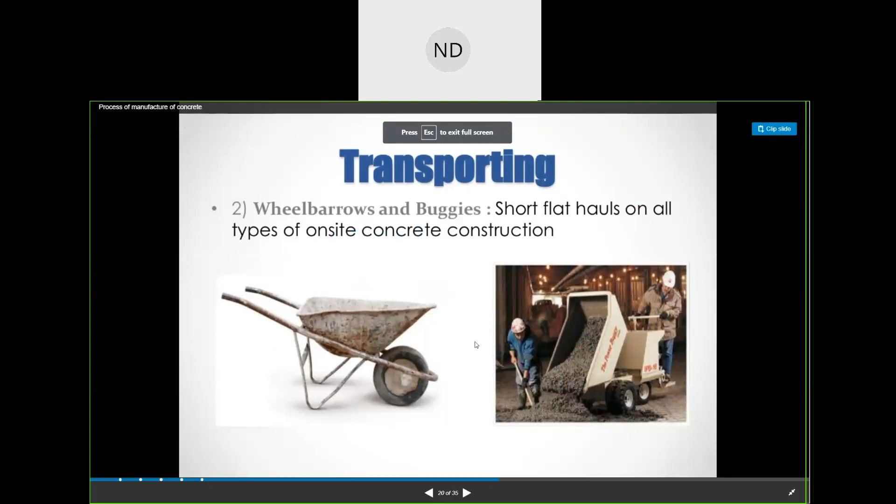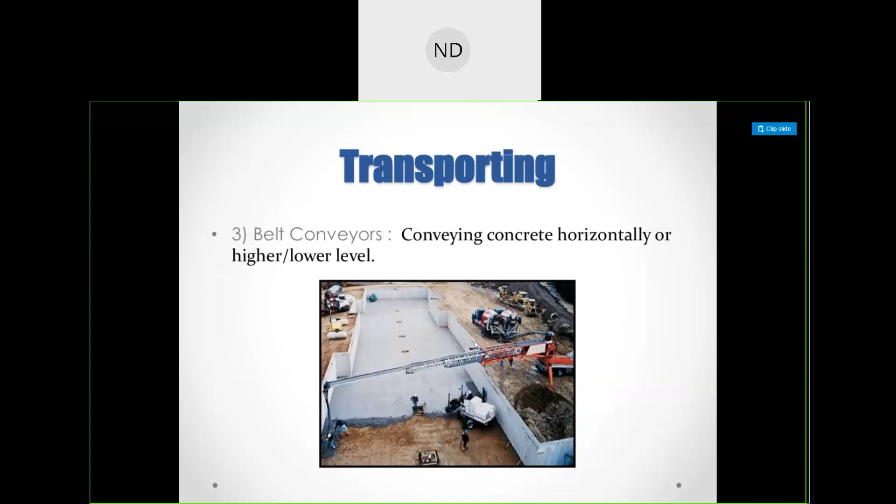I think we have done this, the process of transporting, how we could have transported either by mortar pan, we have wheelbarrows, we have belt conveyors, then we had the cranes and buckets, pumps, transit mixers. We have already talked about this.

Now the next step was, after transporting the concrete, we will place them and then do the compaction of concrete. So why do we do compaction? So that we can remove these entrapped airs from the concrete. Like when we were doing the mixing, the transporting, and placing them to their places, air gets entrapped in the concrete, so compaction is very important for removing the entrapped airs.

One more thing, why we need to do the compaction and remove the air: because if there is a chance of 1% of air present in the concrete, then the strength of the concrete will get reduced by 6%.

So that our strength of the concrete should not get reduced anyhow, we do the compaction such that we try to remove the entrapped air, so that our concrete remains at its own strength. It does not reduce its strength due to the air entrapped in the process of mixing, transporting, and placing of the concrete. Because if we don't expel the air, what will happen?

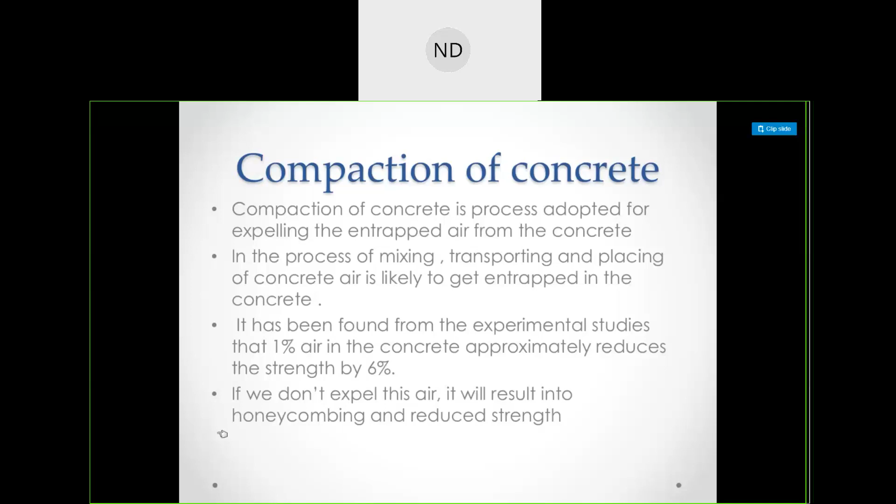Now what are the different methods of concrete compaction? The different methods are: one is hand compaction, the other is compaction by vibration. Hand compaction can be either rodding, ramming, or tamping. So what is rodding? With the help of rodding, we use a rod to compact the concrete.

We use here the ramming, and here the tamping. Now for compaction by vibration, we use either internal vibrator, formwork vibrator, table vibrator, platform vibrator, or surface vibrators, based on our purposes and the conditions.

So I'll show you the things. The first one was hand compaction. You can see here one rod is used for the compaction of this concrete. Hand compaction is used for ordinary and unimportant structures, where workability should be decided in such a way that the chances of honeycombing should be minimum. The various methods of hand compaction are as follows.

This is the hand compaction one. Hand compaction is generally done manually, and obviously with manual compaction, the required compaction which we want will not be achieved, and the air may stay entrapped in the concrete, which will obviously reduce the strength of the structure.

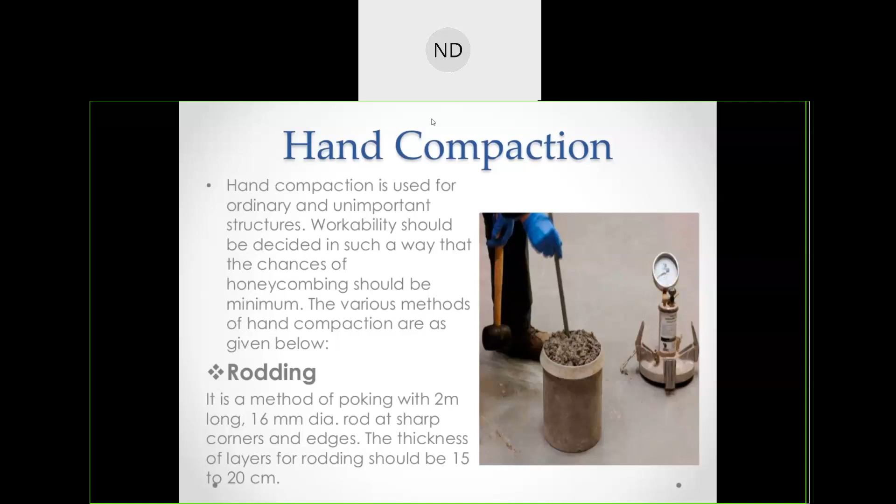Okay, hand compaction. So as compared to machine compaction, hand compaction will not give you the strength of the concrete as compared to the machine one. But when we cannot use higher machines for our construction purpose, and it is less important, like the outside walls of your lawns etc., that also you don't need so much strength, so if you're using concrete, you can do hand compaction also, it's okay for that.

So the first one of hand compaction is rodding. What is rodding? Here we use this method of poking with a 2 meter long, 16 diameter rod.

This is a rod which is 16mm diameter and 2 meters long, used for sharp corners and edges. At the corners we compact by poking it, and on the edges also. The thickness of layers for rodding should be 15 to 20 centimeters. So when your condition is such, we use this rodding.

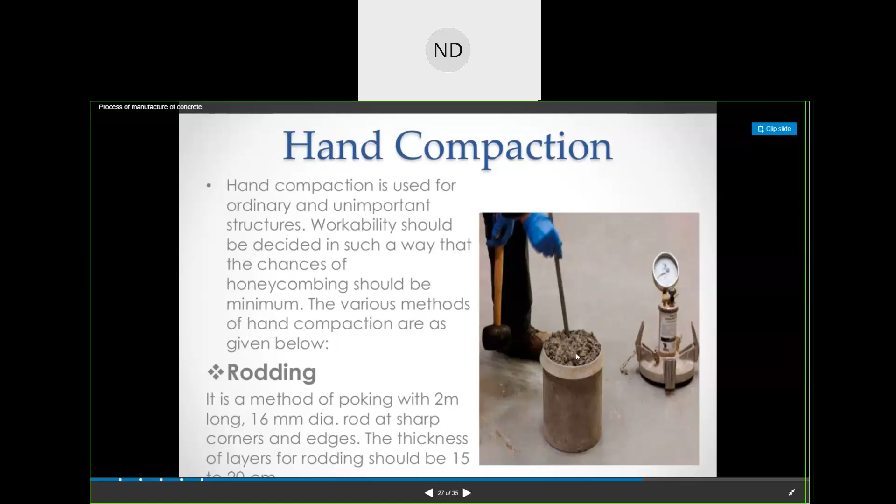Next we can use either a rammer or tamping. This is your rammer. So the compaction which we do by hand, the first one with the rod, has a very small diameter, so you only poke the sides and corners. What about the middle portions? It may be left out, so in small areas where needed, you can use rodding.

But ramming is done when you want general compaction on the ground in plain concrete. It is not used in RCC or on upper floors, only for plain concrete. And tamping - this is a tamper, which is much bigger than your rammer.

So what is tamping? We tamp with this, and the top surface is beaten. It is a method in which the top surface is beaten by a wooden cross beam of cross section 10 centimeter into 10 centimeter. Both compaction and leveling are achieved simultaneously. It is mainly used for roof slabs and road pavements.

This is bigger than your rods, and tamping when done manually - earlier we used to do this also, or in some areas of pavements, or near a lawn where small pavements are provided, those small works also use this manual hand compaction by tamping.

After hand compaction, for unimportant or small construction works we use that manual method. But what about bigger works? In that case we do compaction by vibration. Vibration is imparted to the concrete by mechanical means. It causes temporary liquefaction so that air bubbles come to the top and are expelled.

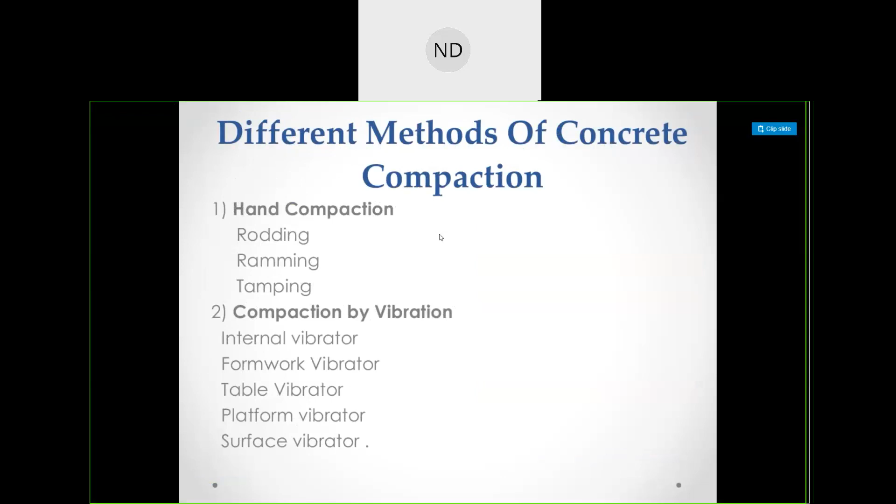Mechanical vibration can be of various types as given: internal vibration - as shown in the previous slide, there were different types of compaction by vibration: internal formwork vibrator, table vibrator, platform vibrator, and surface vibrator. Internal vibrator is the most commonly used technique of concrete vibration.

Internal vibration means we achieve this by placing the vibrator inside the concrete, and then vibrate it such that it enters to the specified point, expelling the air. Vibration is achieved due to eccentric weights attached to the shaft. The needle diameter varies from 20mm to 75mm, and its length varies from 25cm to 90cm. The frequency range adopted is normally 3500 to 5000 revolutions per minute.

When you pour the concrete here, you need the concrete to get inside properly, and move into the reinforcements properly without any air being entrapped. So after placing the concrete, we put this vibrator inside so there is vibration, and any gaps present between the concrete will be removed, and the concrete will fill in again.

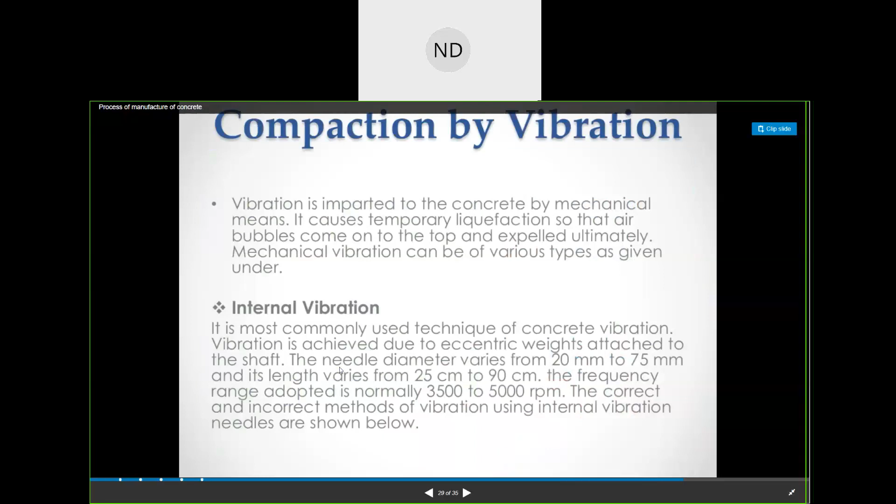Next, we have external vibrators. That was internal vibrators, we used to put the needle inside the concrete and give internal vibrations, right? But the next vibration, made by machine vibration, is what?

It is external. It is adopted where internal vibration cannot be used due to either thin section or heavy reinforcement. When you have large reinforcements, you cannot put your hand inside, you cannot go with your hand, and all the time you cannot put the needle inside and vibrate. You have a large reinforcement area there, right? So you cannot use that part.

When we are using external vibration, remember, internal vibration is more effective compared to external vibration. Because external vibration means when you place this machine here, it will vibrate the formwork, so the extra air which has entered gets removed. But internal one is different, in each place you do this.

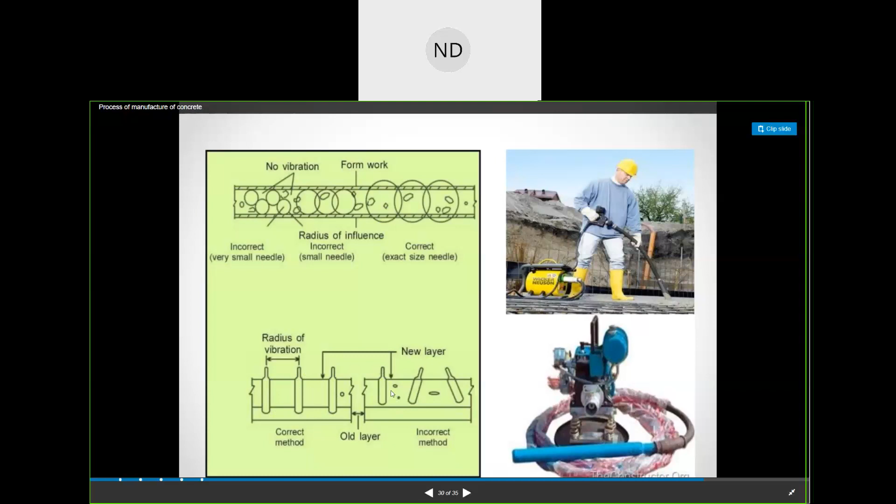This distance, you just check that here there is no issue, it is efficient, right? Because at small distances you give the internal vibration, you make sure that the air is not there. But that is not the case with external. Just you vibrate the structure or the member here, and whatever is to be removed, the entrapped air, gets removed, but there might be some voids as compared to internal one.

There is another vibrating method, which is table vibration. Now, what is table vibration? It is mainly used for laboratories where concrete is put on the table.

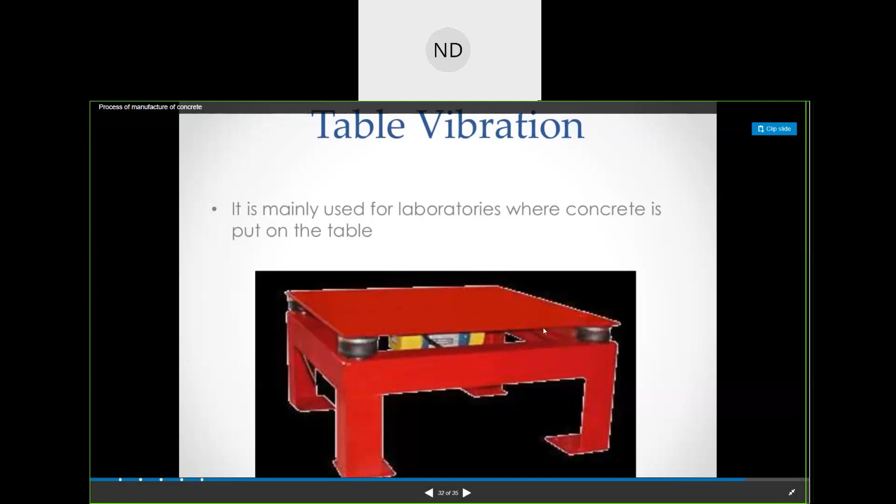When we need to pour concrete on the table so that the entrapped air gets removed, we make sure our entrapped air is removed, and then we use that concrete for making a concrete cube, or for any other members we want to construct, or for experiment purposes. Then we use this table vibrator, where we vibrate and the concrete gets flattened after removing the extra entrapped air.

Another one is platform vibration, which is similar to table vibration, but it is for large construction or large scale work. Like for ready-made slabs, a huge member, we can use this platform vibrator for our compaction purpose.

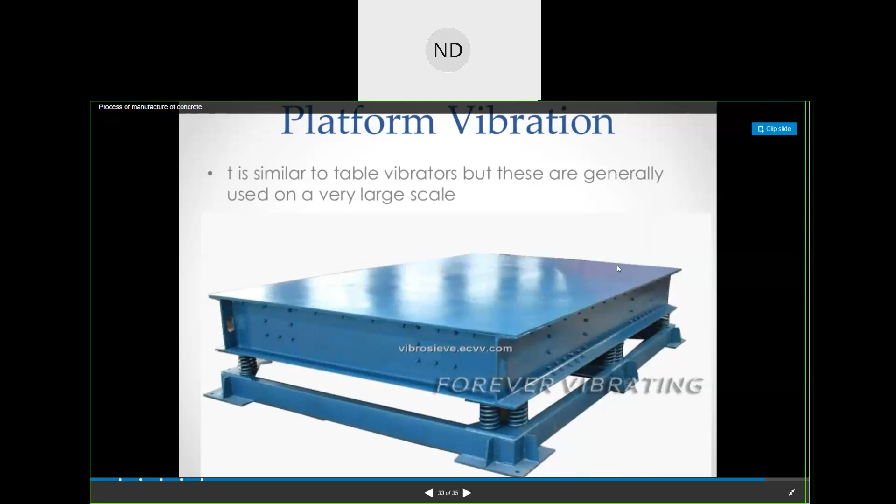Now the next one is surface vibration, also called screed board vibrators. The action is similar to that of tamping. How we used to tamp, right?

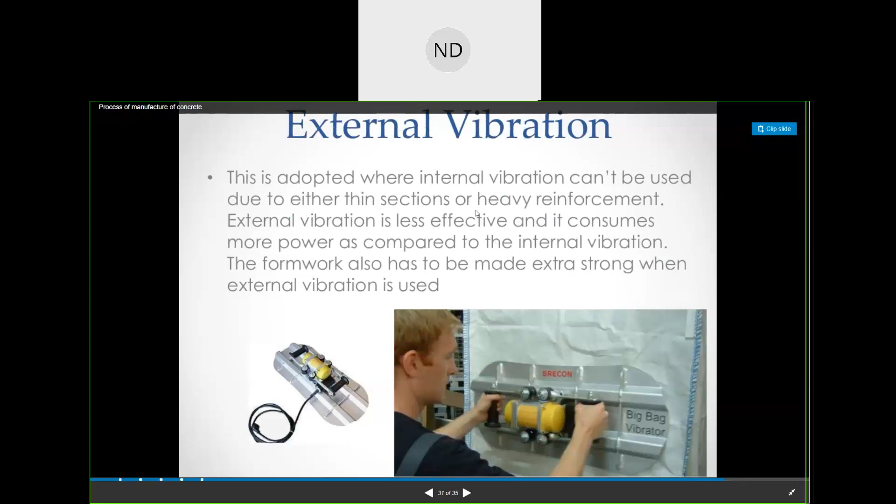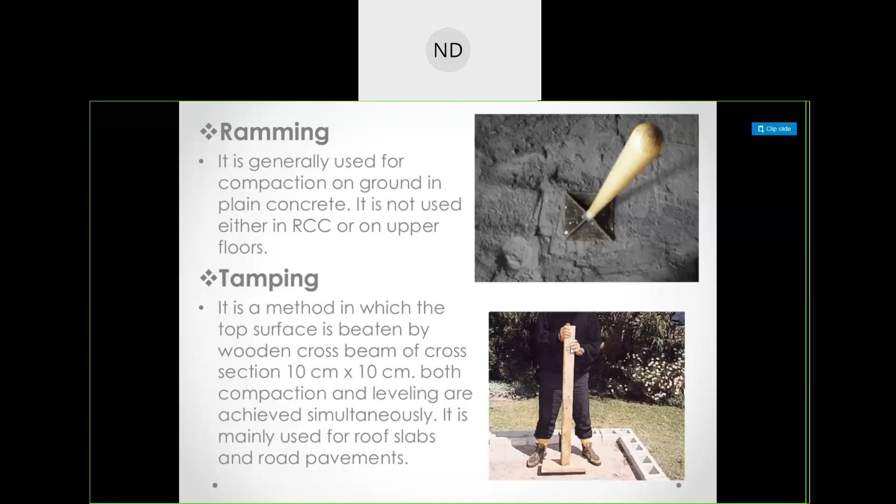We used to do the tamping this way, we used to compact it from a certain height, using this tamper. So the surface vibrator is similar here.

In the surface vibrator, what we do is the same as tamping, only you have two handles here. The action is the same, you have to compact with this portion. But the vibrator is placed on a screed board and the vibration is given on the surface.

It is mainly used for roof slabs, road pavements, etc., but it is not effective beyond 15 centimeters. For lesser depth of construction, you can use this surface vibration.

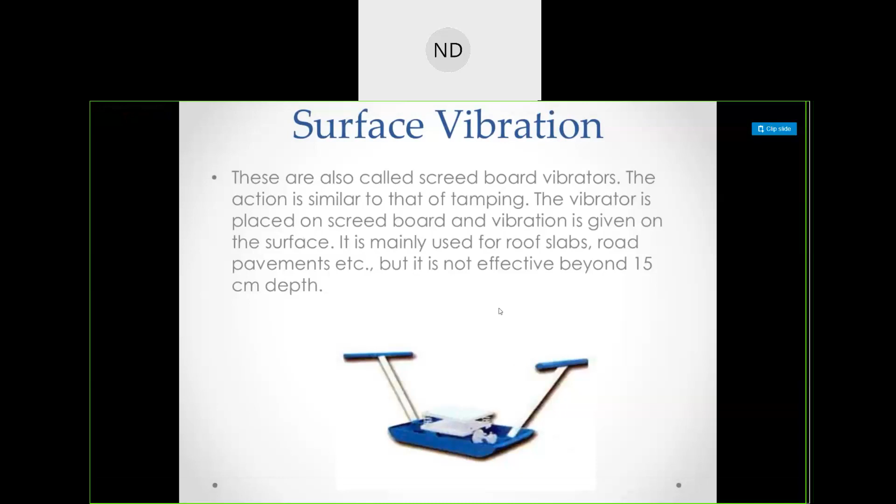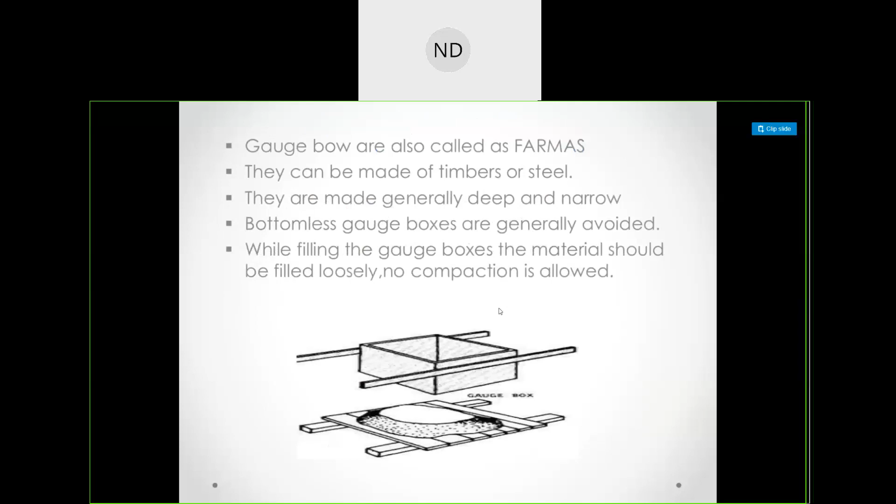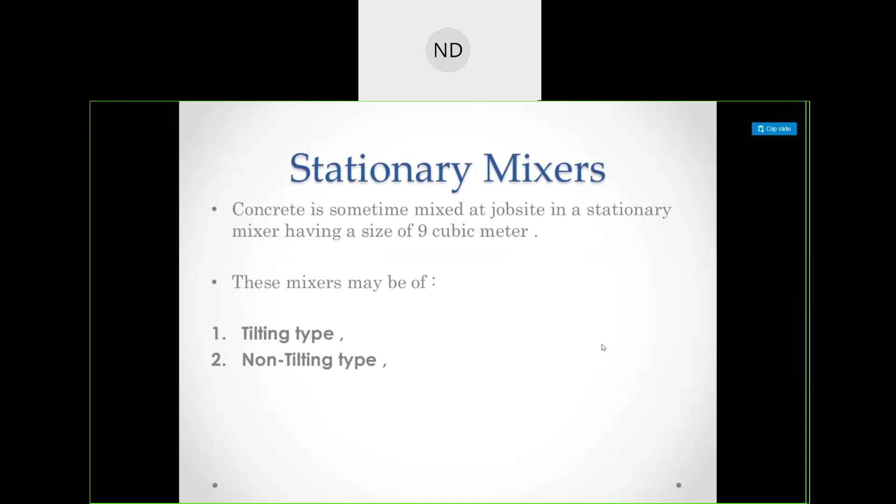So this was your manufacturing process of concrete. We have seen batching, mixing, transportation, placing, and compacting. This was your manufacturing process. In this way you manufacture.

Now when we go, let me go and see where is the other part. I think I have stopped sharing now. Now we'll go to the types of concrete. Okay, where is it... wait.

Once we know the procedure for the manufacture of concrete, after compaction we can directly keep it for curing, and then we give the finishing.

But when we do the types of concrete, there are different types based on your binding material, cement or lime it can be. But the main one, let me show you. I'll share the screen once again.

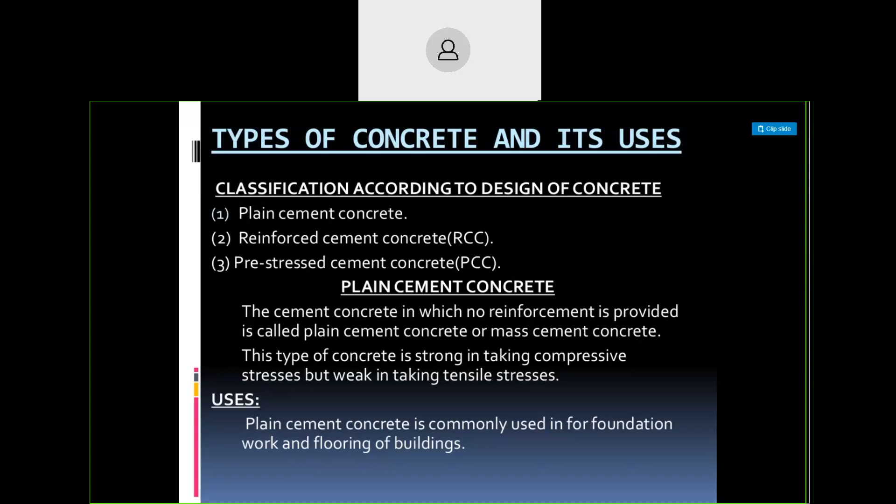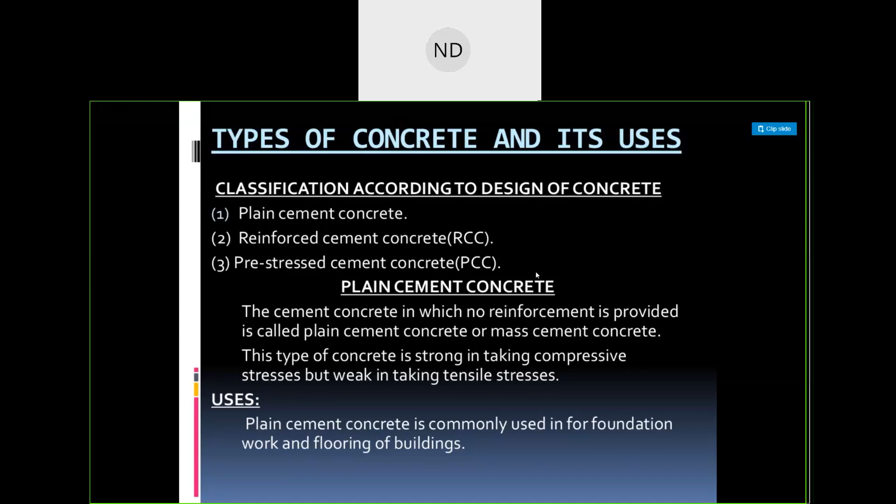What we do is not exactly reinforcement, but in pre-stressed cement concrete we use tendons. Tendons are like wire strands, very huge wire strands made of different numbers of wires together - these are your cables. These are given tension and then released so that compressive stresses are already developed there. Let me show you.

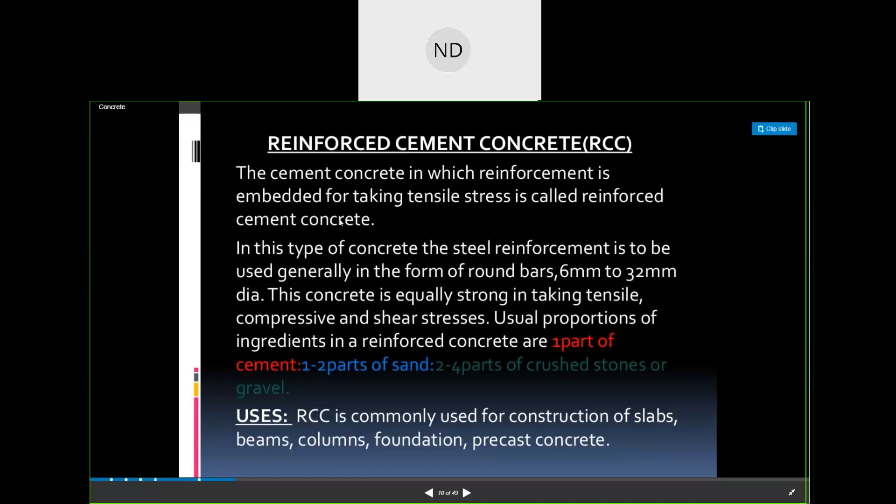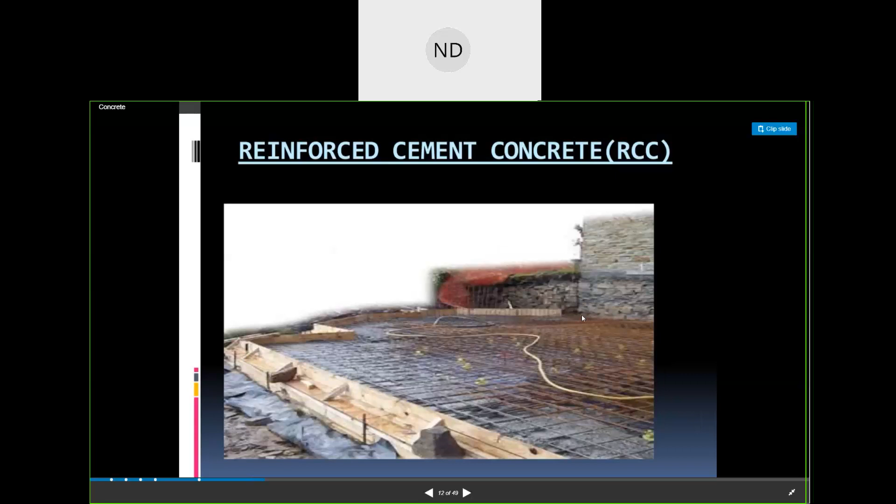Why is this not going. This was the reinforced cement concrete, where you use these rods - so these are your RCC, some pictures of RCC. So now what is pre-stressed? Your pre-stressed concrete was what?

The cement concrete in which high compressive stresses are artificially induced before their actual use is called pre-stressed cement concrete, because earlier I told you, before any load is applied, we stress the concrete by giving it tension.

So what we used to do in pre-stressed cement concrete, we used to artificially give tension to our member. We used to pull the tendons present within the member, give tension, anchor them, then release them. We used to cut these tendons and then they used to get stressed inside, and as a result stresses were already developed.

But now what about those stresses, what will they do when there is any external load applied? These stresses which are developed inside are going to resist these stresses, and therefore there will be no stresses due to this external load.